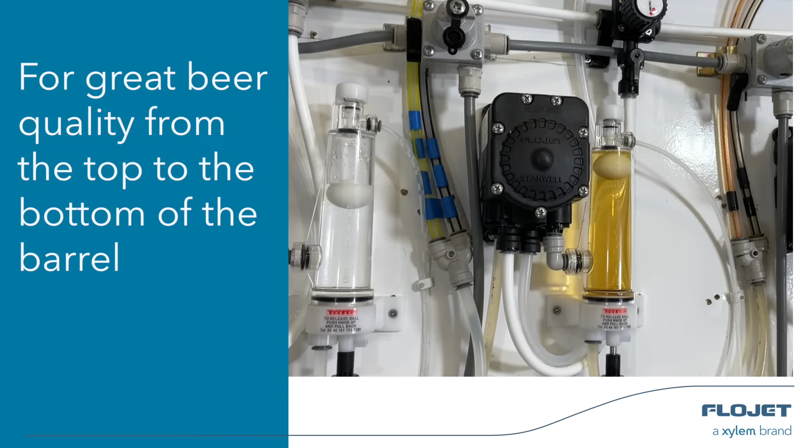The Flojet G56 gas or air operated beer pump, for great beer quality from the top to the bottom of the barrel.

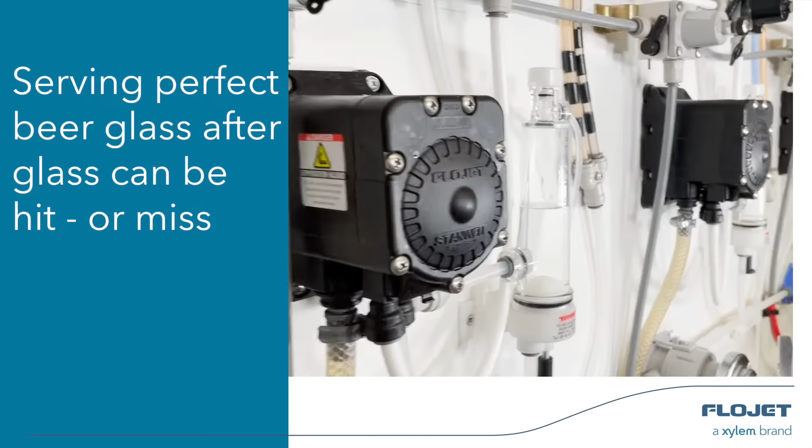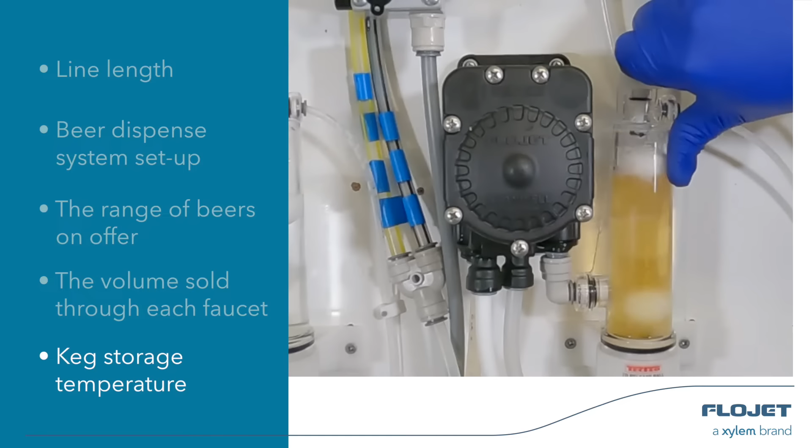The Flojet G56 pump has been designed to take all that variability out of how your beer dispenses and to ultimately save you money. Without the G56 pump, what typical problems do customers have?

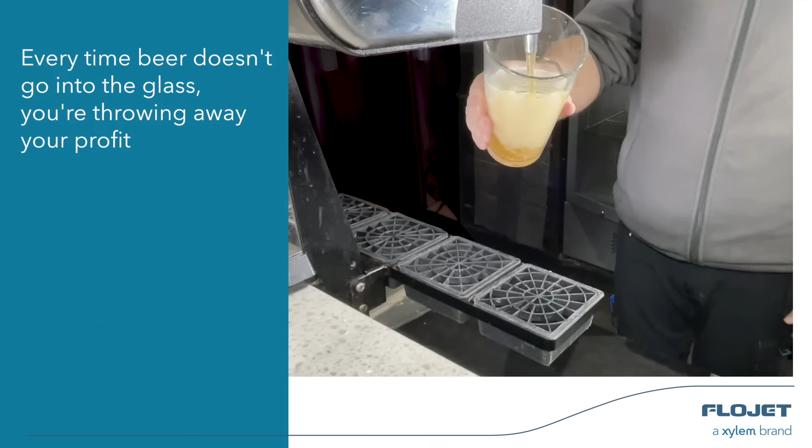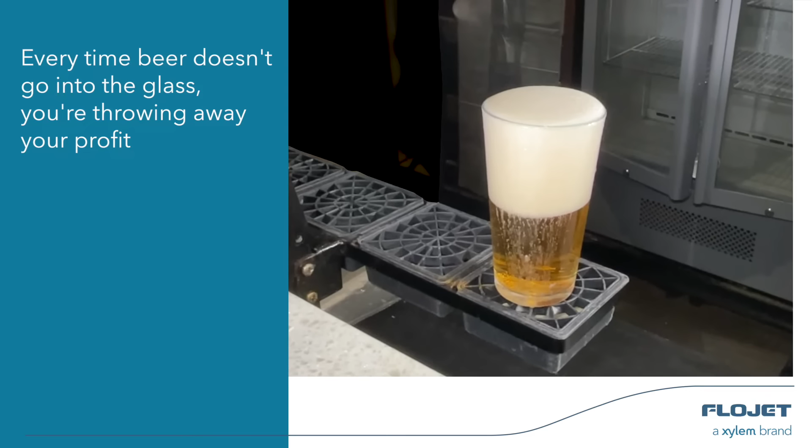Every time you cut the head off a glass of beer, you're throwing profits away. And any time beer flows over the side of a glass because the beer is too lively and over-gassed, you're also throwing profits away. Think of it like this.

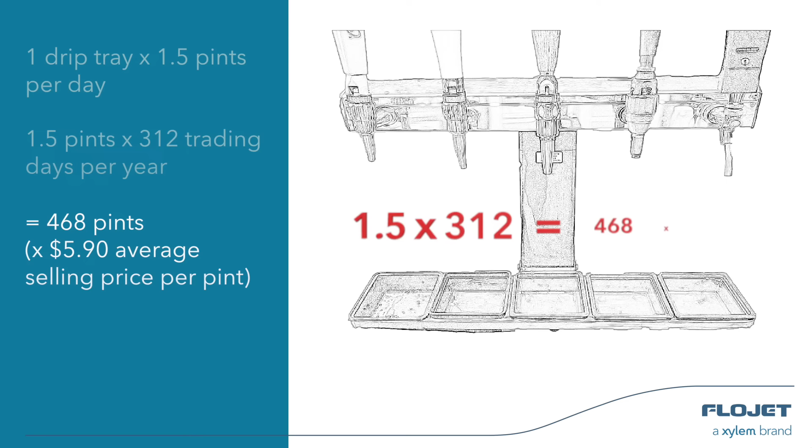If every faucet in a bar wastes just one drip tray of beer each day and then trades for 312 days in that year, that's equivalent to approximately 468 pints of wasted beer worth $2,761 per faucet of beer waste every year.

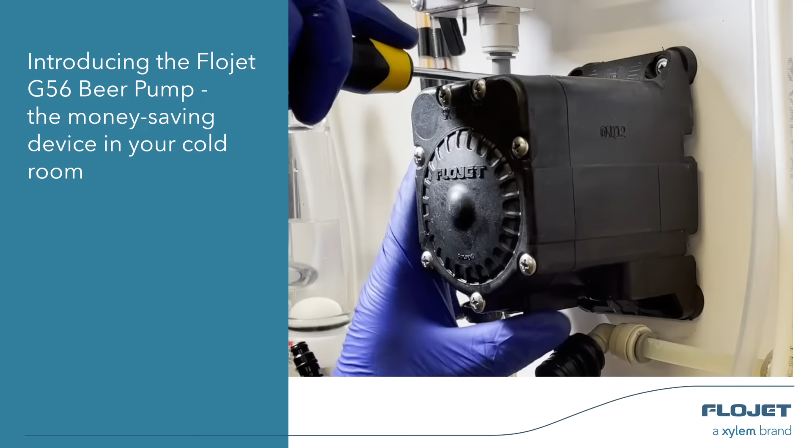The Flojet G56 beer pump. For a small initial cost to set up, the G56 pump pays for itself, quickly becoming a money-saving device in your cold room. It does this by helping to eliminate avoidable beer waste.

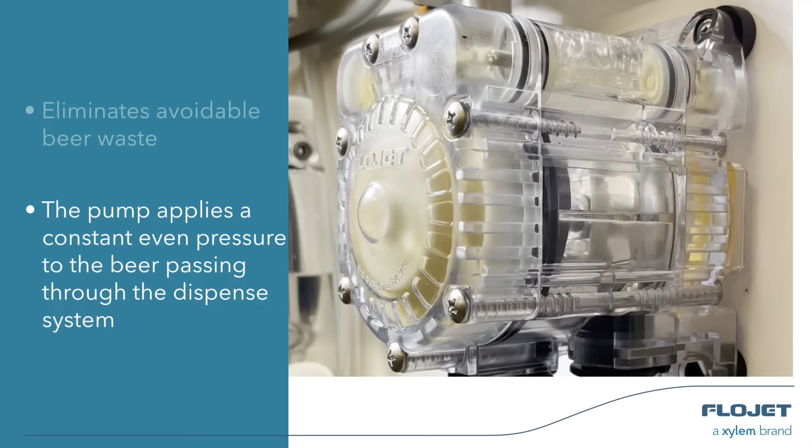The G56 beer pump works by applying a constant, even pressure to the beer passing through the dispense system. This is particularly important for systems with long beer lines and where temperatures are liable to vary.

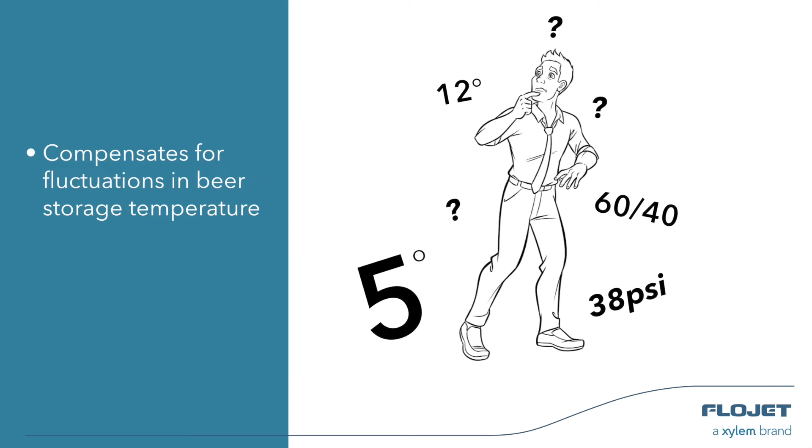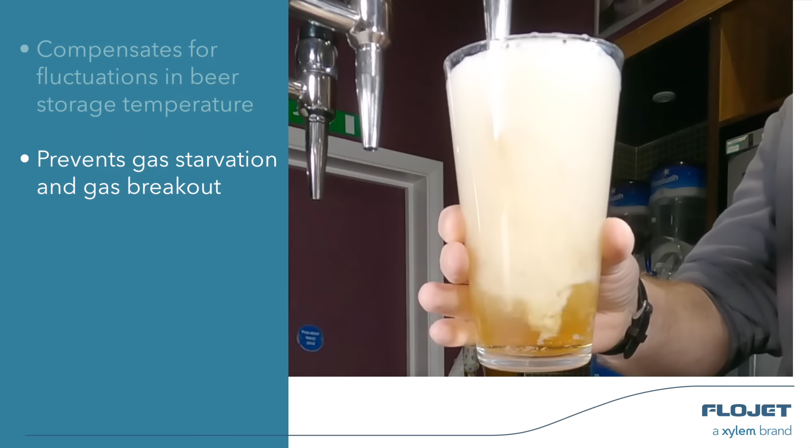Beer stored at 12 degrees and dispensed using 60-40 mixed gas needs a top pressure of 38 psi. But if the beer temperature rises by just 5 degrees, the top pressure needs to adjust by 8 psi to compensate. In long lines, if pressure is insufficient to propel the beer to the faucet, CO2 from the beer is released, causing the beer to foam, resulting in wastage and ultimately lifeless beer and lost profits.

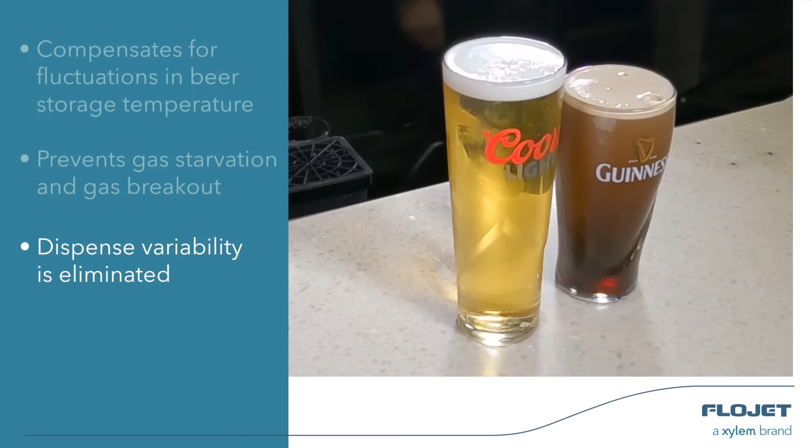Having a Flojet G56 beer pump fitted means that this variability is smoothed out. Not only that, the pump can be an essential part of a beer line cleaning system, with wall-mounted cleaning sockets.

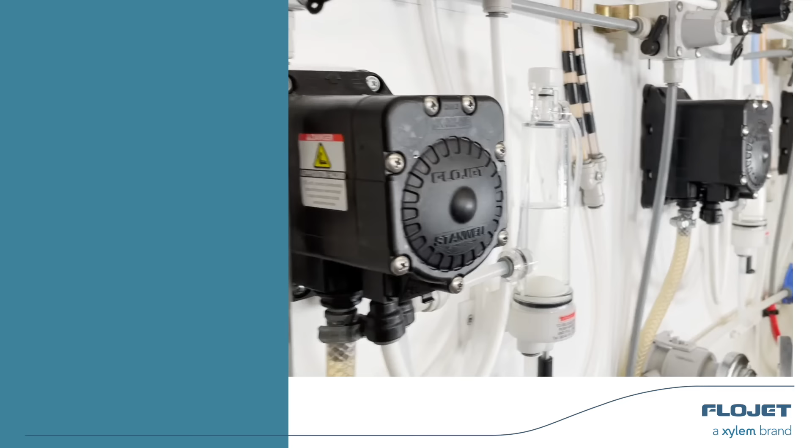The Flojet G56 beer pump product benefits. This pump has quickly become an essential part of the standard beer dispense system.

Installation of the Flojet G56 is simple and straightforward, with push-fit 3/8 fittings. Other fittings are also available.

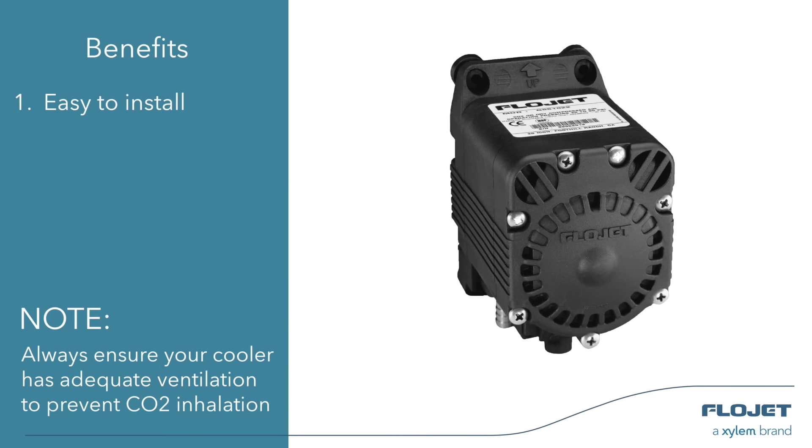The Flojet G56 pump is extremely easy to keep clean. As part of the beer line, it is connected by a 3/8 line to your keg coupler and gets cleaned every time you clean the beer line.

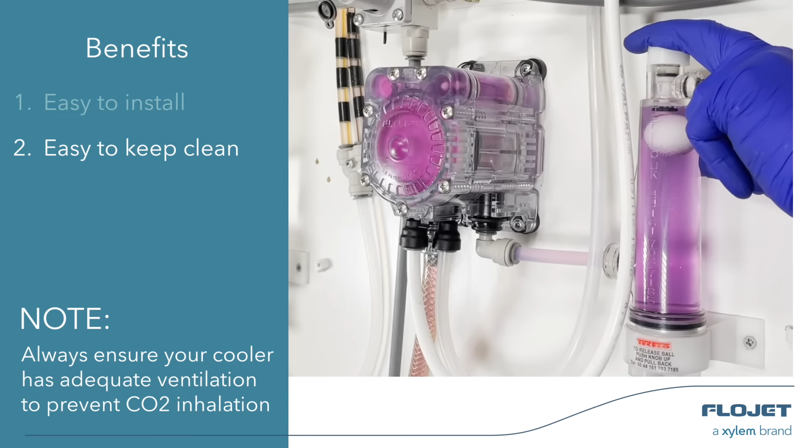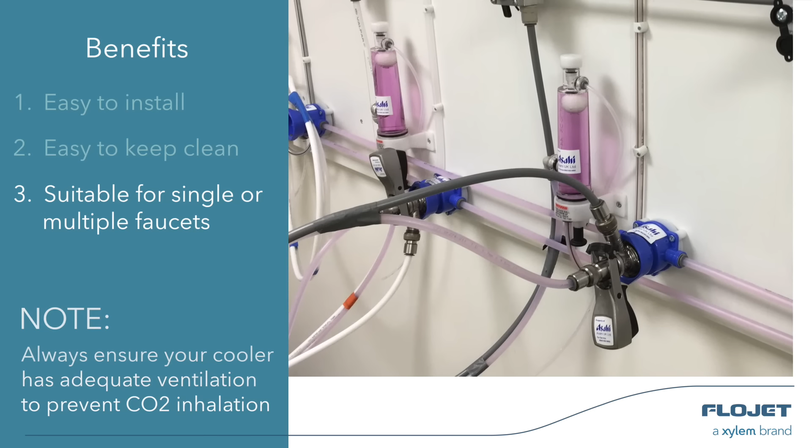The pump that pushes the beer through the system is CO2 gas or compressed air assisted, but this gas or air never comes into contact with your beer. As a result, your beers retain the flavours and characteristics that make each one of them unique.

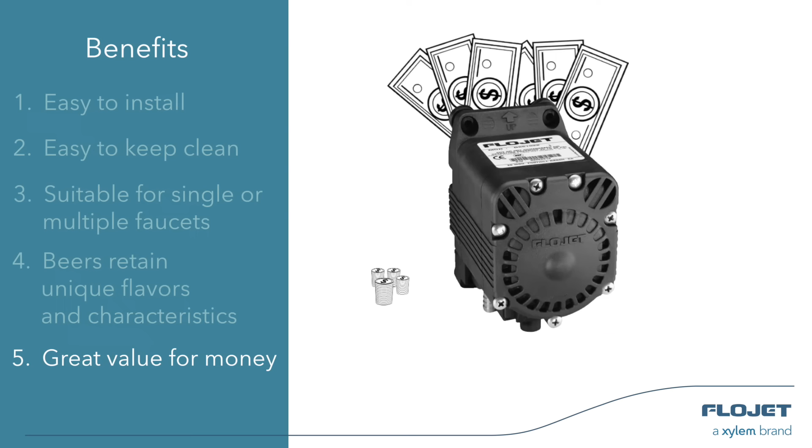The Flojet G56 is surprisingly good value for money and can pay for itself very quickly just by reducing avoidable beer wastage.

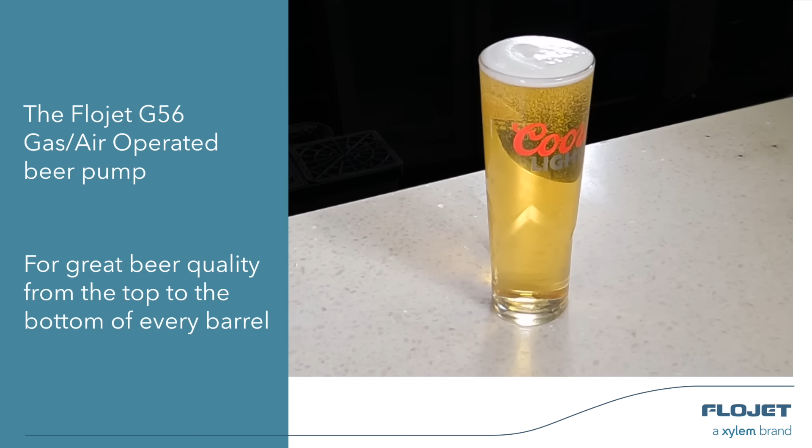So, if you're looking for great quality beer from the top to the bottom of every barrel and you want to make sure that every pint you serve puts money in your till, then you've found the answer, the Flojet G56 beer pump.